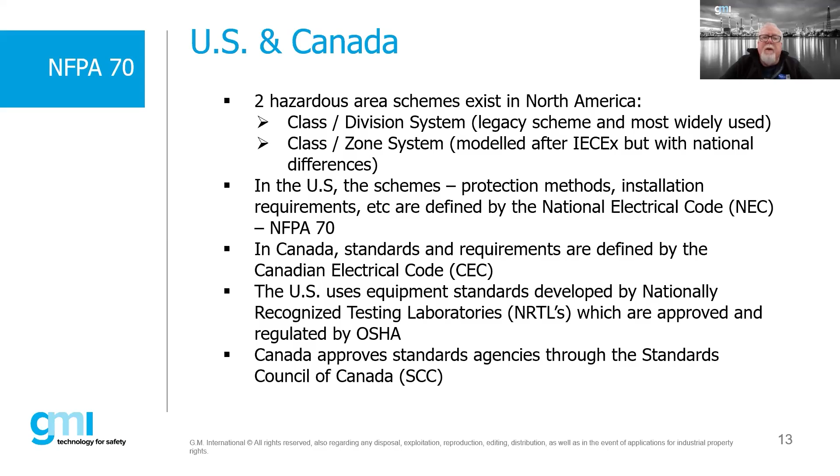But when we actually go through and peel back the onion, you can see organizations like Factory Mutual have developed some standards for US installations. IEEE obviously develops standards for US installations. So there are other standard writing bodies out there, but basically the testing laboratories all must be approved by the Occupational Safety and Health Administration, which is our health and safety organization at the federal level that governs all this.

So some different examples, as I mentioned, UL, FM, there's Edison Testing Labs, which is actually owned by Intertek. You'll see an ETL standard. And again, these standards involve the equipment design and equipment requirements, and also the testing procedures to verify the suitability.

So when it comes to a facility here in the United States, including new ones, we can continue on with the class and division concept, or we can move towards the class and zone concept for area classification. Way back in 1996, when the zone concept was introduced within the NEC, there was a huge rush for manufacturers to get their products certified for both class division and class zone, assuming industry would automatically shift over to the zone concept. But that never really took place. A vast majority of our facilities in the United States still follow the division concept.

However, there is a means in which products that are suitable under the NEC for class zone can be used in a class division area and vice versa. And that is spelled out within the NEC in Articles 500. So the scheme defines the equipment acceptable and so forth. So the NEC is an installation standard.

Probably the closest thing that would mirror this, for those of you familiar with the international side, is 60079-14, or that in conjunction with a general wiring regulation, such as in the UK BS 7671, I think it is. I may be mistaken on the digit. For example, in Australia, they follow AS 3000, which is their wiring regulations.

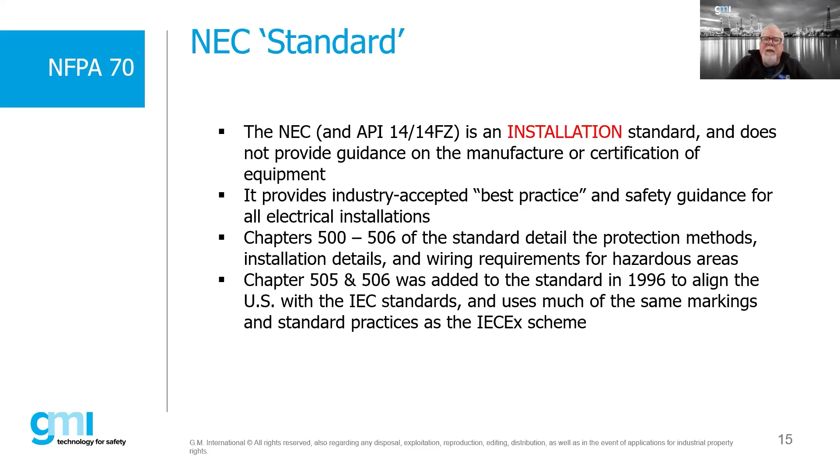505 and 506 were added to the standard in the 1996 edition to align the U.S. with IEC standards. And we use pretty much the same markings and standard practices as in the IECEx scheme. So things like gas groups, T codes, EPLs, all of that information is now part of the same marking scheme that you will find for products that are listed under the NEC in Article 505 under the zone concept.

So the addition of 505 created these different hazardous zone schemes. 500 deals with class and division methodology, which is primarily used. 505 and 506 were basically our zone concepts. For gases and vapors, that information would be located in 505. If we're dealing with combustible dust, we deal with Chapter 506.

It has not, however, generated wide acceptance or use except in the marine and offshore industries. So the zone concept has been adopted here in the United States by certain clients, primarily in the offshore oil and gas industry, but onshore facilities, refineries, chemical plants, petrochem, are still primarily around the class and division concept.

So chapters 501 through 503, those detail the installation requirements for various hazardous environments. And 504 details the installation requirements for intrinsically safe. Now, the good thing is under Article 504, if you look at the installation details and you compare that versus almost every other standard that talks about the installation of intrinsic safety, it's very, very close. It's almost identical.

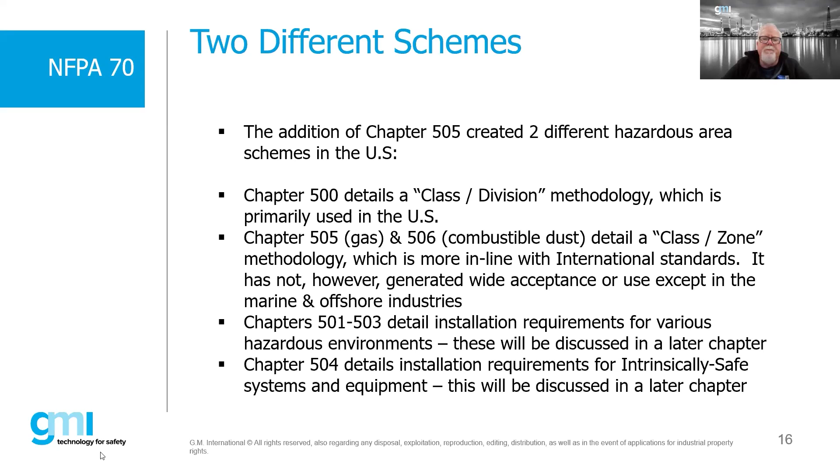Now, what's interesting to note is remember this, that we are a republic of 50 states here in the United States. And for those of you who are not familiar with it, we have the federal government and we also have our state laws and rules and regulations. And the federal government is responsible for federal regulations, whatever's written in the Constitution of the United States. Well, things like electrical safety are not spelled out within the Constitution. So the actual enforcement arms are really left up to the states. And it's up to each individual state to determine exactly what the requirements are for electrical installation in their particular state.

So just because the NFPA updates the National Electric Code every 3 years, what's really important to understand is if you were doing a project, for example, in Texas, they were following the 2020 version, and that's good. But if we're going to do a project in another state, we just have to make sure that we're following the right edition of the National Electric Code. For hazardous locations, a lot of changes aren't too terribly dramatic from every code cycle. So there's not big differences.

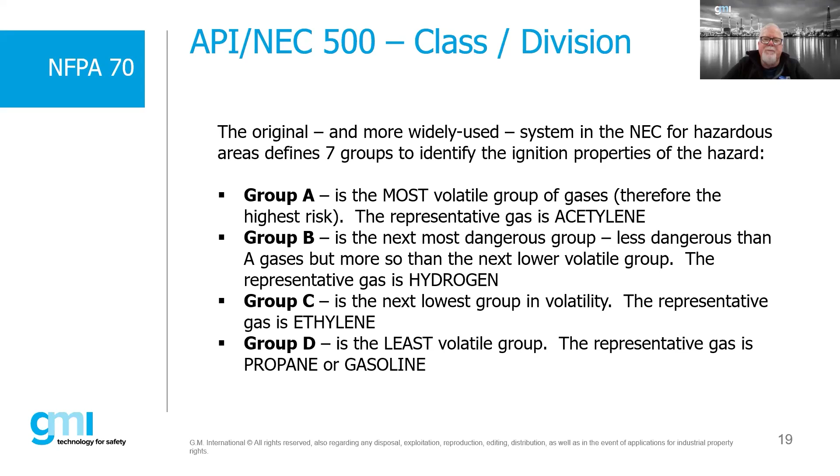So under the zone concept, however, we have adopted exactly the same as what the international community has, where we have IIA, which is considered to be gases such as propane. IIB is the next most dangerous, again, represented by ethylene. And then IIC is considered to be acetylene and hydrogen. So what you might find, under international requirements, we may mark something like this, where we see a IIB plus H2. What that is telling us, it's good for IIA gases, IIB gases, as well as hydrogen, but not acetylene.

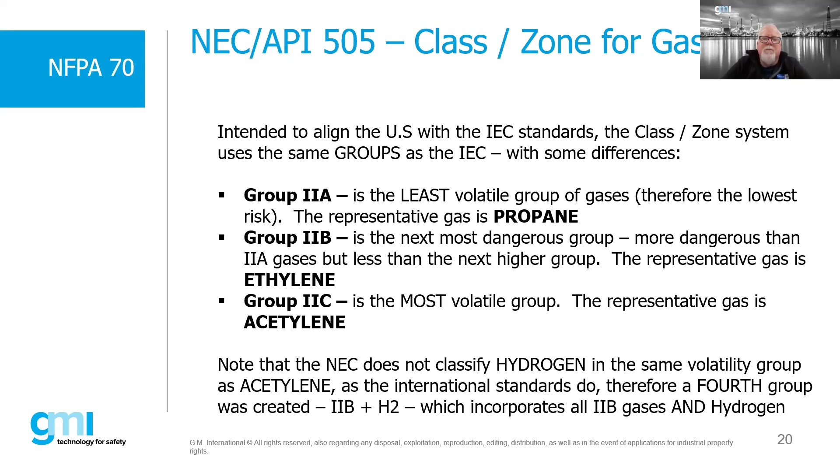So that was actually a marking concept that was really based upon the US when the international world started looking at this separation of gases. Acetylene is one of those gases that's very difficult to build products to. For example, a flat flanged flameproof enclosure, we cannot build those enclosures to be suitable for acetylene, but we can make them suitable for hydrogen applications. So that's not uncommon. In the US, we would mark that product Class I, Groups B, C, and D, stating that this product is good for hydrogen, ethylene, propane, everything except acetylene.

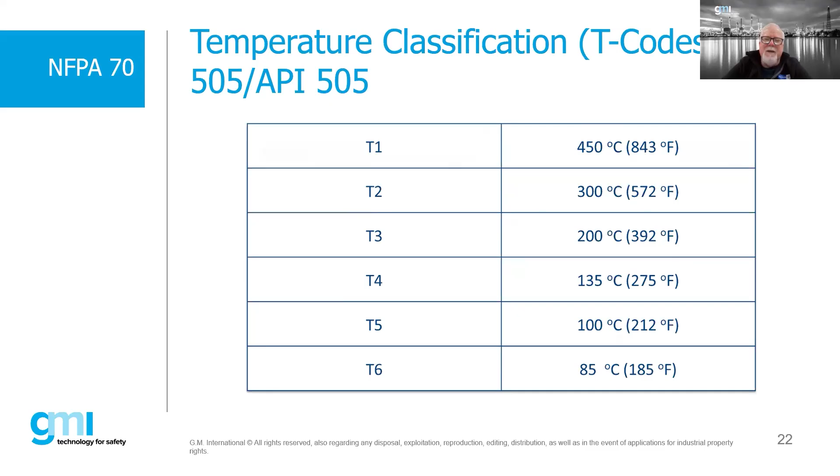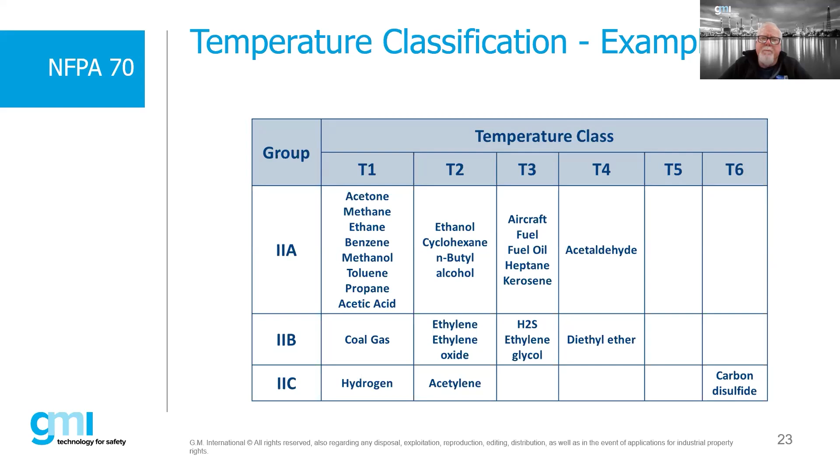So if you think about heat-producing devices that you typically would find in a refinery or chemical plant, the types of devices that generate a lot of heat are typically lights. Transformers, certainly, motors could, but lighting was always a big issue in our facilities. When we started introducing high-intensity discharge lighting, we found that a 175 watt mercury vapor light would generate a fair amount of heat, and it might be too hot for some particular vapors and gases that we might find in industry.

So, under pressure from industry, the National Electric Code introduced these intermediate temperature codes to further break it down, because there's a large jump between T2, which is 300 degrees, and T3, which is 200 degrees. These intermediate temperature codes were brought into play to allow us to use higher wattage, high intensity discharge type lighting. Now, why was this not really a big issue in the international world? Because in many cases, the choice of lighting was typically linear fluorescents, which operate much cooler than a typical high intensity discharge lamp.

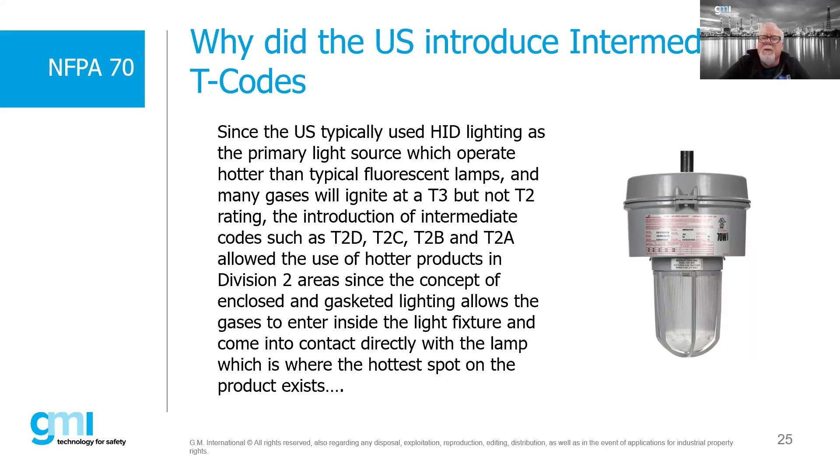Now, fast forward to today, most everybody is going with LEDs. So we don't necessarily have these intermediate temperature code issues like we used to, because LEDs typically operate much cooler than, say, a 150 watt high pressure sodium or a 175 watt metal halide lamp. So the whole idea of these intermediate temperature codes was really to address higher wattage lighting for use in hazardous locations. And again, with the technology changing, it's not as much of an issue as it used to be.

Now, in the US world, you'll hear terms like NEMA ratings. And sometimes people ask, what are these and where do they come from? NEMA is the National Electrical Manufacturers Association, which came out with a standard years and years ago with a designation for enclosures as far as their suitability for an environment. This is called the NEMA 250 standard, and it was very much adopted by industry here in the United States.

So sometimes you'll see charts that will talk about ingress protection and how they compare versus NEMA. And they're very similar, but they're not identical because NEMA standards also talk about things like the corrosion resistance materials of the particular product, where the 60529 really focuses the attention primarily on the ingress of liquids or solids. There are some sections, however, in the 60529 for IP codes that do address corrosion, but the NEMA document, if you will, really expands upon that greatly.

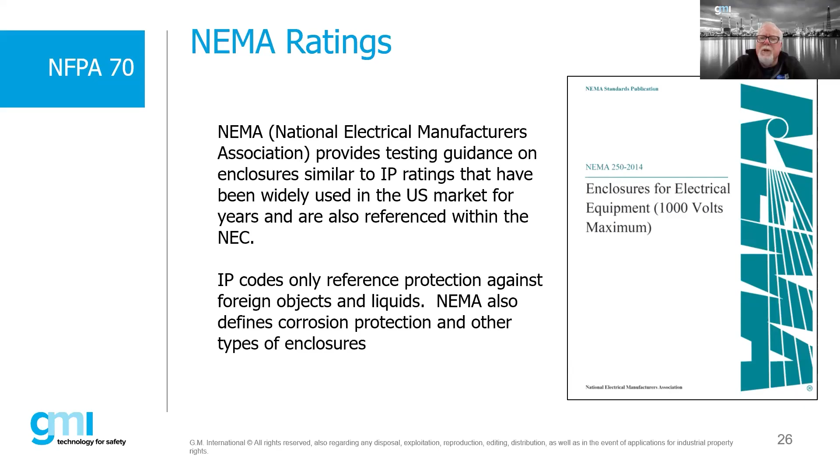So you might hear a term about a NEMA 4X enclosure. And a NEMA 4X enclosure is basically very much a watertight and a corrosion resistant type material. So it has a higher level of protection against corrosion, like what you see here. There's also what you might find a NEMA 4 enclosure. So the type 4 enclosure and the 4X enclosure are basically built to the same requirements as far as ingress of water or dust. But when we make it 4X, then we mean that that enclosure now might be in a stainless steel material as opposed to a carbon steel.

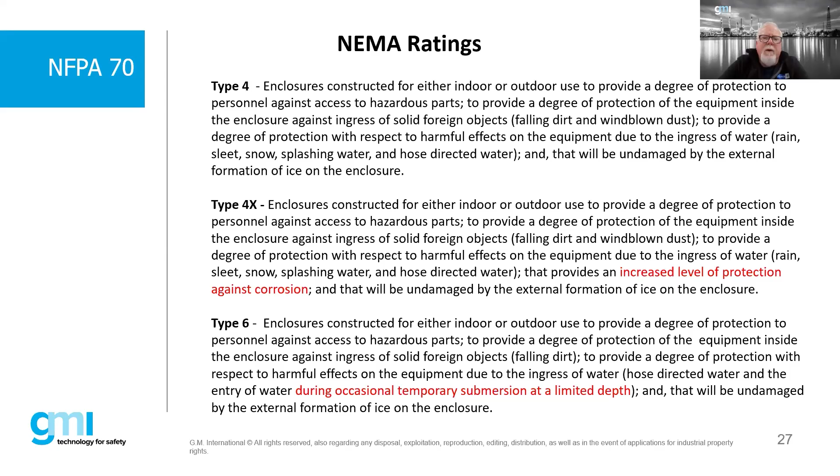It's protected against corrosion. You'll see things like in the hazardous world, they may call out a type 6 enclosure. That's actually like a temporary submersion. It's very similar to an IP67. The other areas that you'll see for NEMA ratings, you'll see something called NEMA 7, NEMA 8, and NEMA 9. So a NEMA 7 enclosure is considered to be a hazardous location enclosure. So you might find things like an explosion-proof box that will actually say it's NEMA 7.

So a lot of us U.S. engineers use that terminology. If you see that on a specification, if they say we want a type 7 enclosure, then they're basically asking for an explosion-proof enclosure. If they ask for a type 9 enclosure, that means that that enclosure would actually be considered to be a dust ignition proof type enclosure. So we use some of these NEMA terms in relationship to the construction of the enclosures. And sometimes people wonder, where does this come from? Well, now you know, National Electrical Manufacturers Association, and industry adopted this. And even the NFPA has adopted these nomenclatures and they will be called out in various sections within the NEC.

We have a question, Bob, regarding a comparison between NEMA 250 and UL 50E. Yeah. So NEMA basically gives the definition of what should be the actual performance of the product. The UL has developed specific tests to test the products, and that is the details. So, in effect, if you look at the IEC 60529 for ingress protection, that's actually telling you the performance characteristics of this product, and then it also provides details as to the testing procedure.

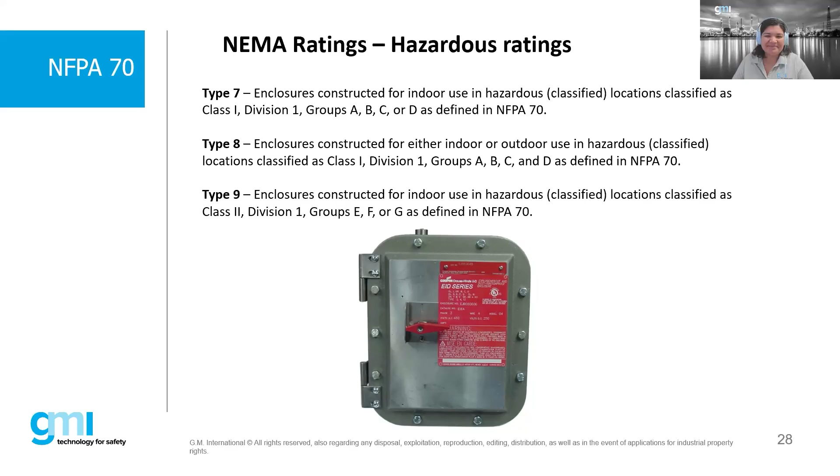So in the US, we have our division concept, as we talked about. We have our Division One and Division Two. So instead of the international world where we have the three zones, we have two divisions. So a Division One area is where we say a flammable gas concentration may exist in normal operation as a result of expected maintenance or repair or leakage. We call that a Division One. A Division Two area is that area in which maybe process is handled, process stored, but it's not going to be there under normal conditions. It would only be there under a rupture or failure.

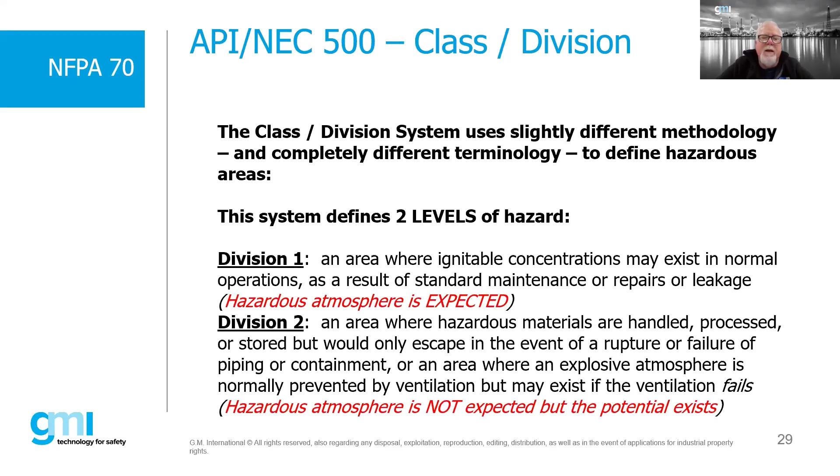So if you really think about it, a Division One in comparison to a Zone Zero or Zone One is basically somewhat of a combination. Division One, in effect, is a combination of Zone Zero and Zone One, where Division Two is basically very, very similar in concept to what we would consider to be a Zone Two environment in the international world. So it's a very similar concept. And again, that's a little bit more of a definition of the class and division.

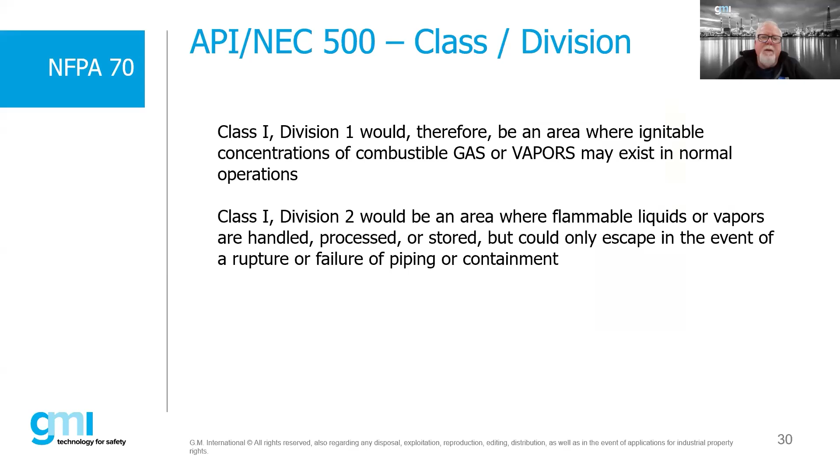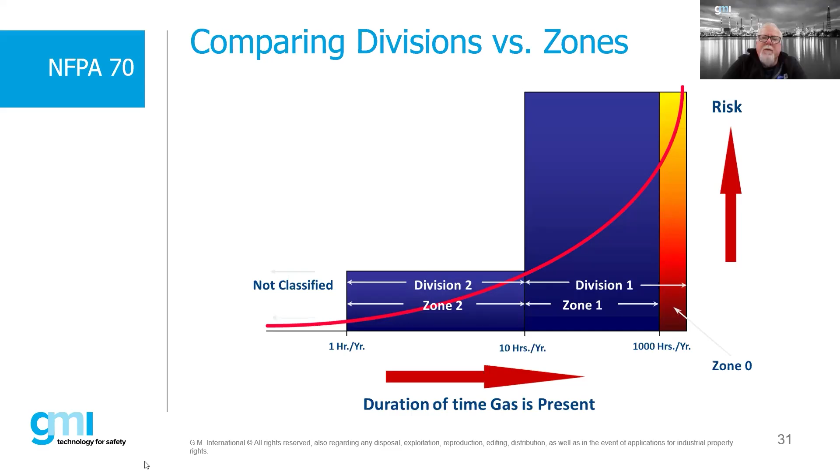Well, in the United States, if you think about a lot of our petrochem facilities and our weather, they are typically outdoors and have a lot of ventilation. We have large areas of land for these facilities. These refineries were built out in the middle of nowhere. They were outdoors, so we didn't enclose things, and therefore we had a tremendous amount of ventilation. Therefore, our Division One was typically much less. Also, because we had such large facilities, we could mount a lot of equipment outside of the hazardous location where it would be considered almost non-hazardous, or we'd get it out of a Division One area and put it into a Zone or Division Two area. So just by location, by the size of the facilities.

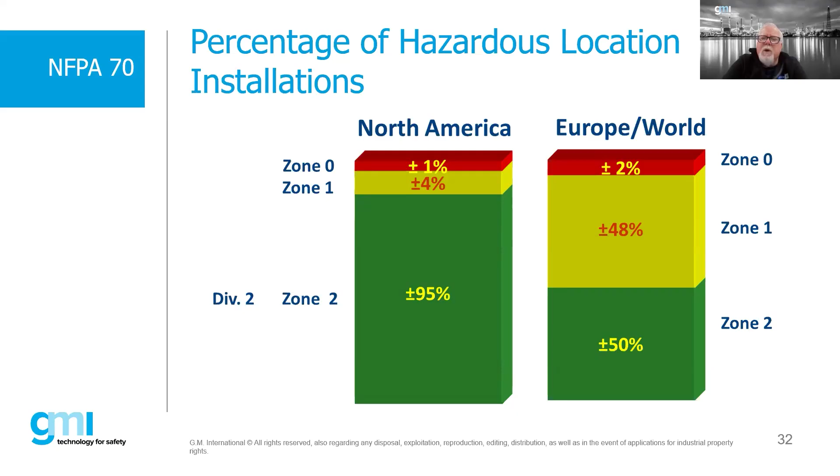And of course, as we move further north, when workers have to do the work during wintertime or very cold temperatures, we're going to contain a lot of those facilities within structures that decrease the amount of ventilation. So that's why we would typically find a greater percentage of Zone 1 versus Division 1. That's kind of the theory behind it, and that seems to be somewhat accurate.

Now, within the United States, as far as how many people have actually gone to the zone concept versus the legacy division concept, it's significant. Even though we've been doing this since 1996, 85% of the market in the United States is still around the division concept. The market didn't all of a sudden say we're going to go to the zone concept. They were perfectly happy with what they were doing.

And so we've just kind of stayed that way. The markets that have adopted the zone market are primarily in places in the offshore market because they liked using the concepts under the zone concept, and also areas maybe up in, for example, in Alaska. Some of the original facilities up there, because they were contained, normally they would say that's going to be a Division 1 area. Well, if we now make it Zone 1, we can use protection concepts outside of explosion proof or pressurized. We could use things like increased safety.

So there are certain pockets within the United States where the zone concept is active, but again, a majority is still the division. Within Canada, however, when they introduced the zone concept, and they did that in 1997 within the Canadian Electric Code, they basically said any new facilities must be done around the zone concept. So they changed it. They said, you don't get a choice, Mr. Customer. You have to go to the zone concept. So Canada basically got rid of the division concept. And so any new installations for the last 20, 30 years now have all been around the zone concept as opposed to the division market.

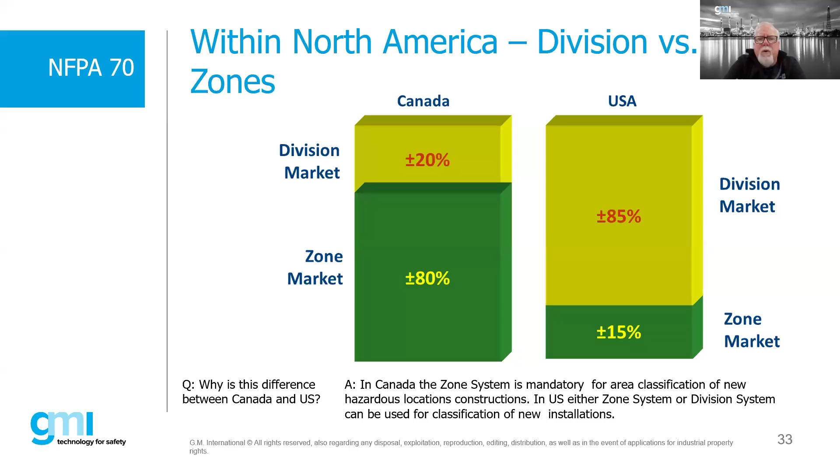So a little bit about the American Petroleum Institute, as I brought up before. The American Petroleum Institute is an organization that writes a tremendous amount of standards specifically for the oil and gas industry. And not just electrical standards, but all different kinds of standards. You'll see API standards for all different kinds of equipment that's used in the oil and gas industry.

However, the recommended practices for hazardous locations were introduced way back in 1991. And the 505 recommended practice was introduced using the zone concept in 1997. And that dovetails right along with the fact that the National Electric Code introduced Article 505 in 1996. So API basically adopted that.

Now, when you really look closely at what the API recommended practices are for classification, it's very, very similar to what you will find in NFPA documents for area classification, except it's really geared specifically for the oil and gas industry. So API is very commonly used in the offshore markets as well as onshore, and you will see this document as a basis for area classification. 500 will be area classification around the division concept, and RP 505 will be the area classification around the zone concept.

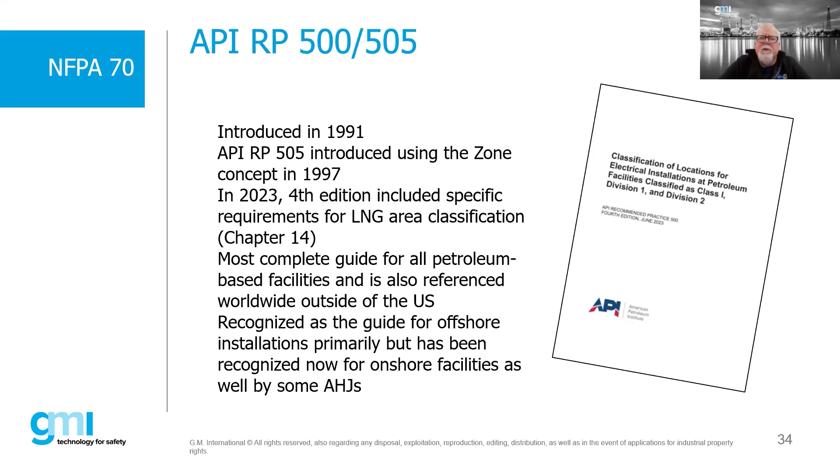So equipment markings. Under API and NEC 505, we now mark these products in this fashion. On a product that's marked in the US, we'll say Class 1 and then Zone 0, which means that it's good for all hazardous locations with hazardous gas. A Class 1 Zone 1 product is good for Zone 1 or Zone 2 areas, and then Class 1 Zone 2 is good for Zone 2 areas only.

So this is an example of a product that is listed by, in this case, FM. And the reason why I know this is FM, you'll see a CSA on there as well. FM and CSA are examples of two nationally recognized test labs here in the United States. You'll see the little FM with a US and an FM with a C. That means that the FM testing on this particular product was done both to the Canadian standard as well as the US standard, where the CSA did not have any reference to that. It just says CSA. We would assume that was only done to a Canadian standard.

So if this product was being used, it would be suitable for class division applications. It doesn't say anything about zone, but it may be further on the label that just got cut off. There you see that reference to type 4X. That's the NEMA rating that we talked about. And then you see that it says Class 1, Division 2, Groups B, C, and D, Class 2, Division 2, Groups E, F, and G, and Class 3.

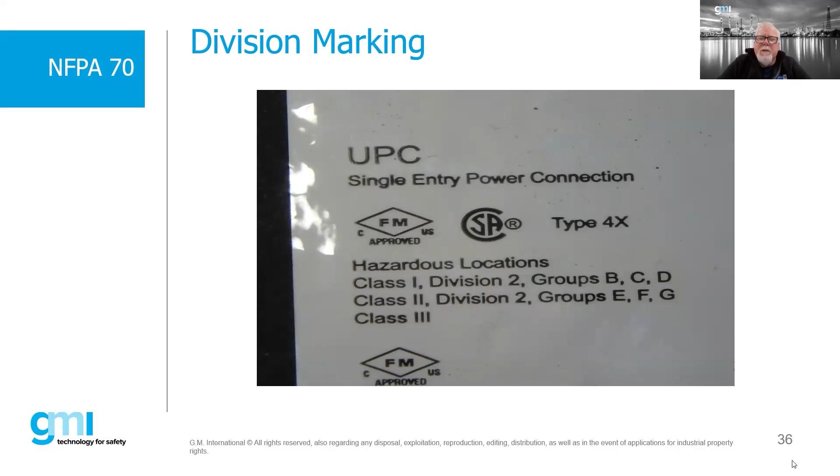Now, here's an example of an enclosure, if you will. In this case, it was UL classified, and you'll see a UL on the right-hand side with a little C. That means it was certified to the Canadian market by Underwriters Laboratories. In this case, it said Class 1, Groups C and D, Class 2, Groups E, F, and G, and then also it says Class 1, Zone 1, Group IIB.

Now notice it does not say division on this particular product. It just says Class 1, Group C and D. If it doesn't say division on the label, that means it's default, it's good for both Division 1 and Division 2. So that's a little bugaboo that I don't like about our system, that it doesn't actually spell out and tell you specifically,

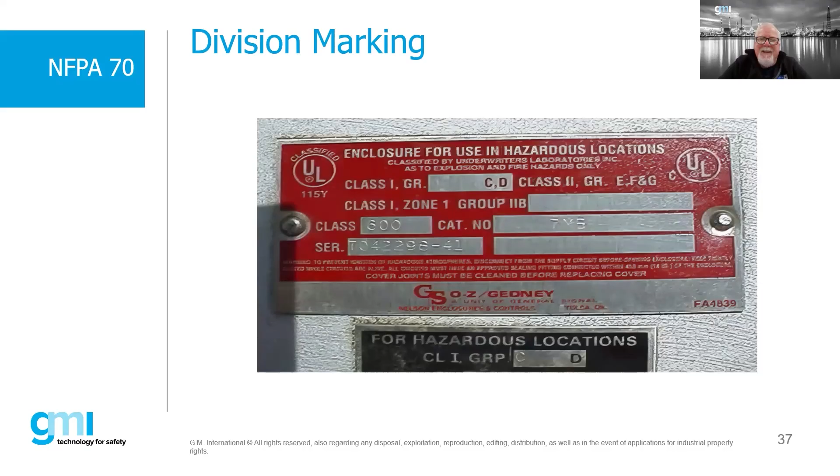whether or not I can use this in Division 1 or Division 2, because the default is if it doesn't state it, then it's assumed to be good for both Division 1 and Division 2, which I don't like, but I'm not God. However, in the zone concept, we do have to put down the zone of use.

So some products you'll actually see that temperature range on there. In some cases, you will not. If it doesn't have it, then the default is minus 20 to plus 40. So that's kind of an example of a couple different requirements, if you will, for marking of equipment. They're putting it all together.

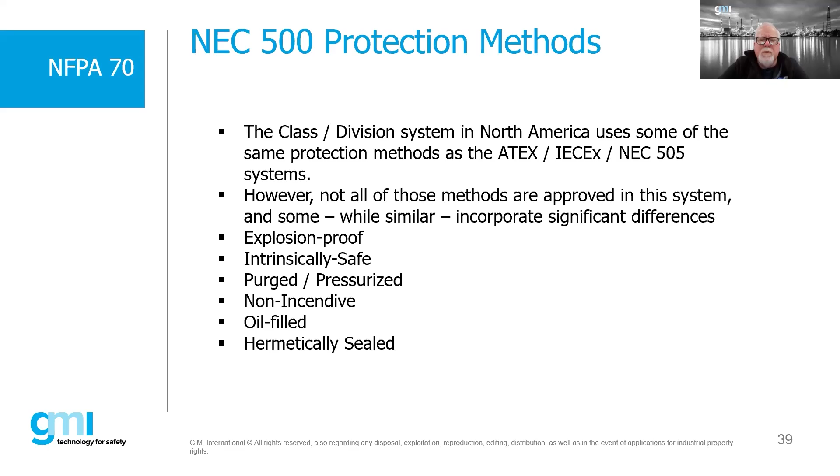We also have what is called oil-filled, which is a very similar concept to Ex o. And we also have this concept called hermetically sealed, where we may seal a switch in a glass tube. This was a very common protection concept that we used for many, many years with push button stations. So these are some of the concepts that are referenced specifically within the NEC.

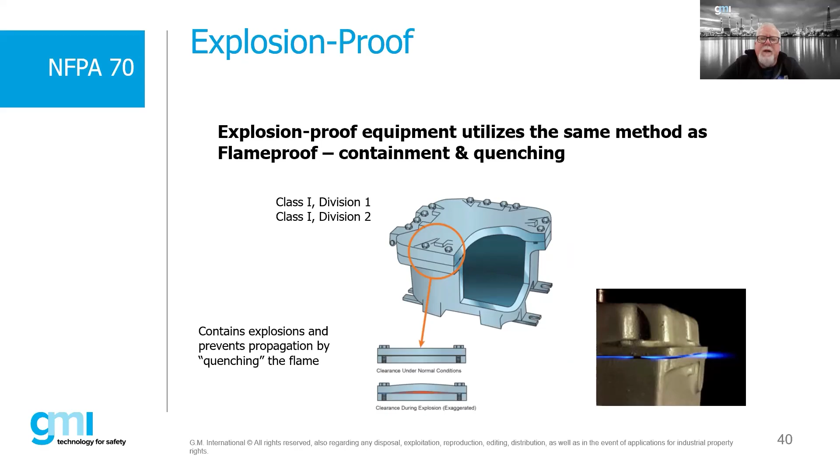So explosion proof does the exact same thing as flame proof. It quenches and contains an explosion, and we quench the flame. There is a big difference, however, between explosion proof and flame proof in the standpoint that explosion proof boxes have to withstand a 4 times pressure test, where a flame proof product only has to be tested to 1.5 times maximum pressure.

And there are some other differences. However, the testing for explosion proof boxes is tested to the UL 1203 standard for explosion proof. However, if we were testing it to the North American standards for flame proof, we tested to UL 60079-1 for flame proof enclosures. So there is a difference between the standards.

In some cases, it's pretty dramatic, but the concept works the same. There's a higher level of safety built into an explosion proof product than there is for a flame proof product, but they operate on the same principle.

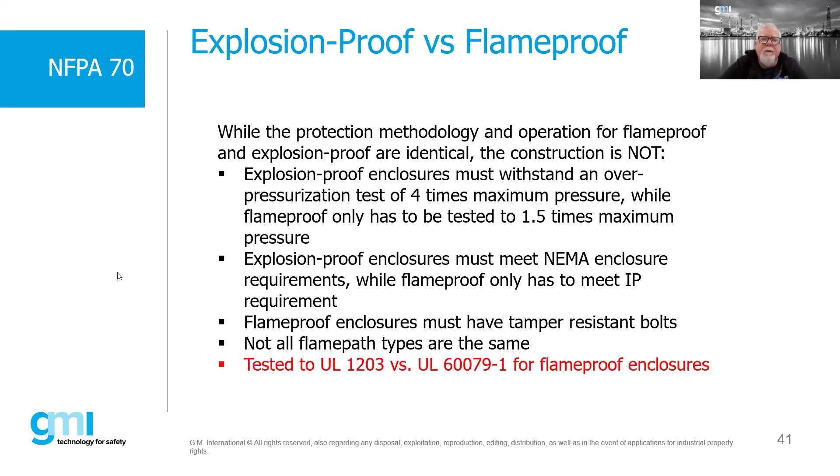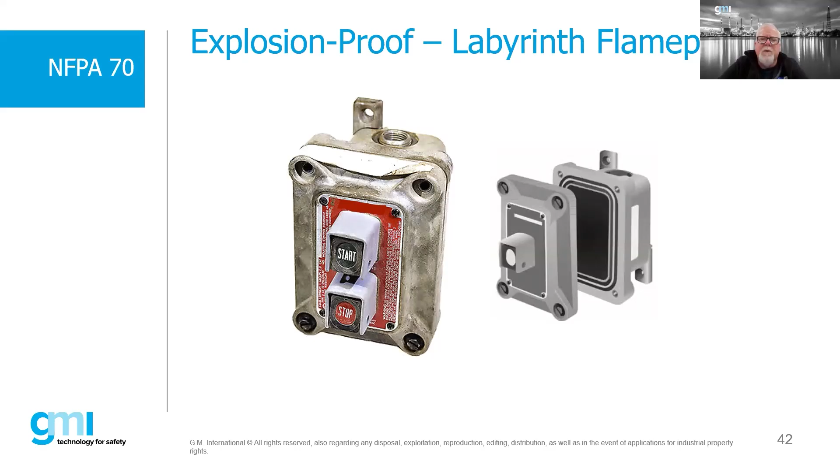But primarily, most of these enclosures are cast metal. We use cast aluminum, cast steel, cast stainless steel, very similar in concept and the same materials that you would find in the flame-proof world.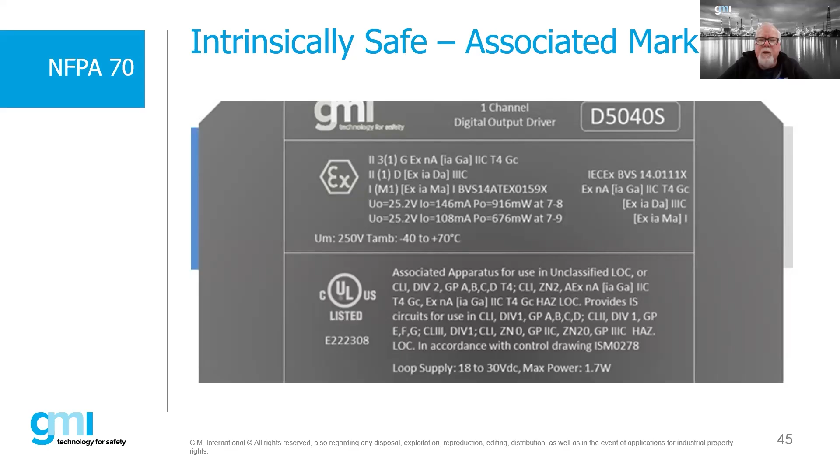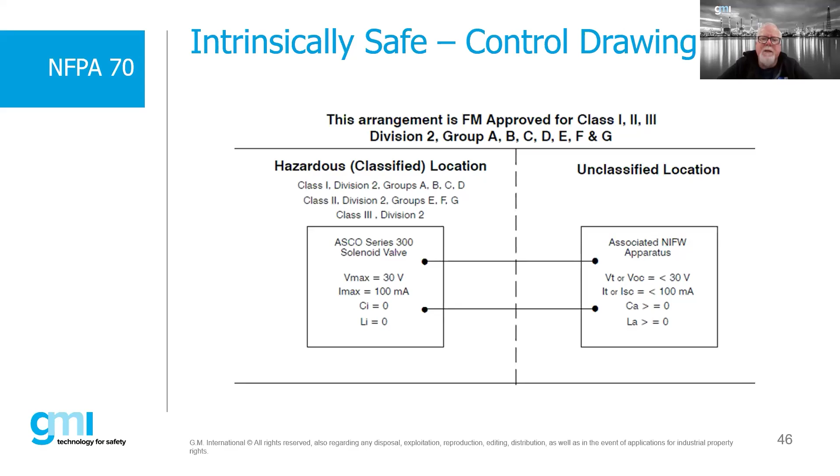So, for those of you who just joined us maybe a little bit late, we were looking at this and we realized, oh my goodness, we've got a lot of information that we want to cover, and we didn't really get into the installation details and how that's different. So what we are planning on doing is that we're going to have a follow-up webinar here in the next month or so. So make sure that you sign up for that.

But if you cannot make it, that's okay, because these presentations are all on the GMI YouTube channel. So even if you can't make our next one, which we'll do the second part of this again here, probably in about 5 or 6 weeks, we'll get into the details as far as installations, which will cover things like glanding, conduit systems, all of that kind of good stuff. We'll cover that in the next webinar.

So we didn't want to kind of rush through some of this stuff because there is so much information, but we have enough there to kind of make this a little bit longer. So that was kind of what we decided to do here to address this.